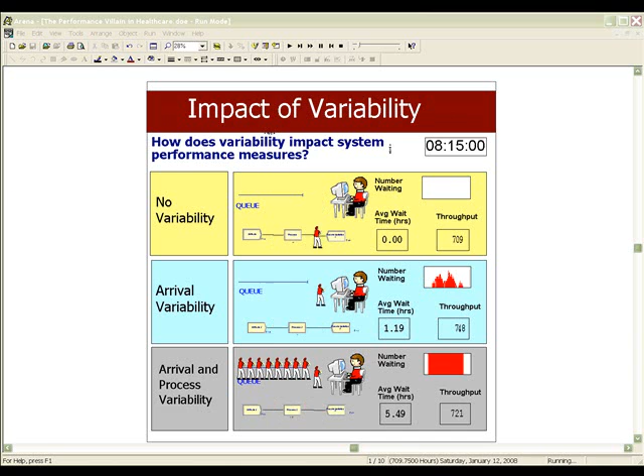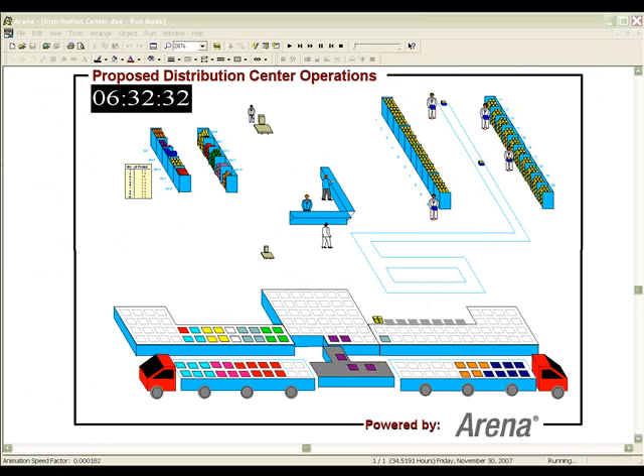Simulation is an advanced tool, typically used by industrial engineers and operations research professionals to design and analyze complex processes. An existing system or proposed system that does not yet exist can be modeled. Simulation is an excellent tool for allowing analysts to predict the future performance and determine the capacity requirements for a particular environment. Key performance measures such as cost, throughput, WIP, and cycle time are used to analyze various system alternatives and determine the best design.

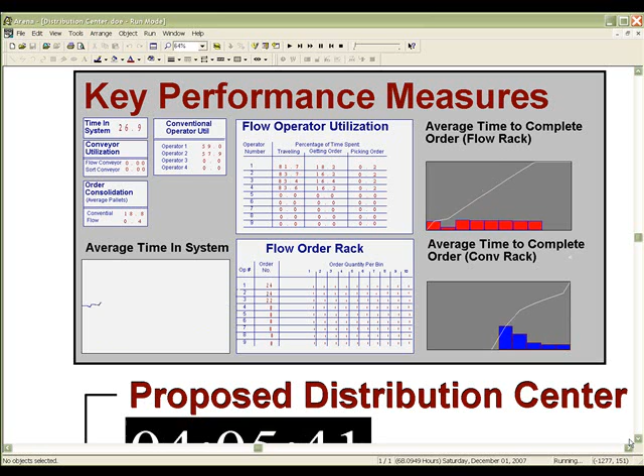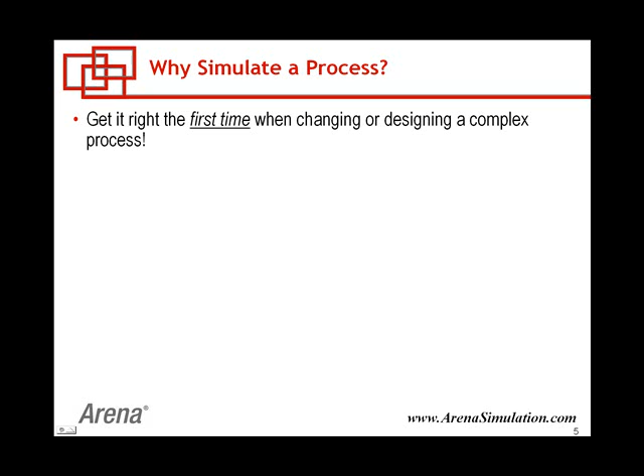Simulation should be used during the design phase of a major project. It allows you to completely understand your system prior to making complex changes or building a new process. Consequently, you get the system requirements right the first time. Today, many corporations have dedicated teams to proven techniques of Lean and Six Sigma initiatives. Arena Simulation is a natural add-on to these projects as it captures the value stream map of a process as well as accounting for the impact of variability.

With the right tools and analysis approaches, you can see improved efficiencies and lowered costs. You mitigate your risks when making major changes when simulation is used. Make your mistakes in the software as opposed to the real world. You will be able to justify capital expenditure decisions and predict resource requirements. The use of animation allows you to communicate ideas to everyone and get team buy-in.

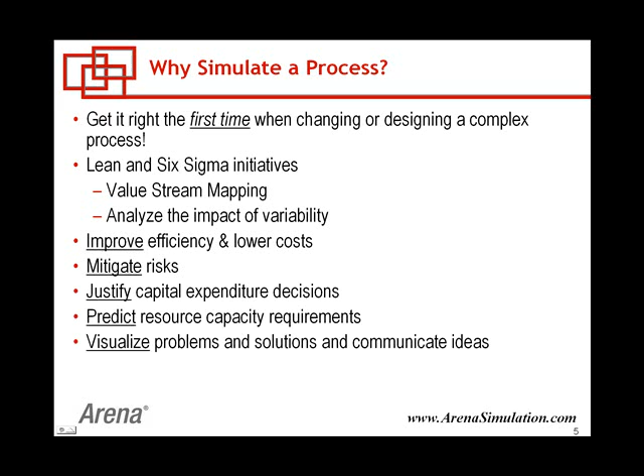From the beginning of a simulation project, when you are mapping out your process flow, you are generating valuable insights. Making the right decisions the first time has proven to provide enormous returns on project investments. Simulation is another tool in your toolbox, and experts know when it will provide critical information. Anytime a major change to a process is going to take place, simulation is appropriate. For example, a new product introduction in a manufacturing environment, an anticipated increase in demand at a call center due to seasonality.

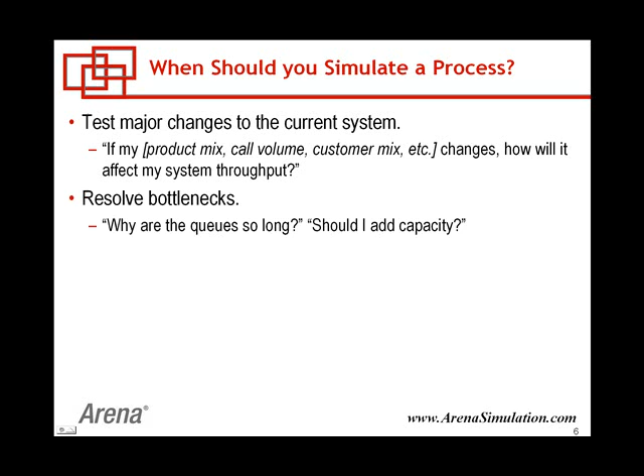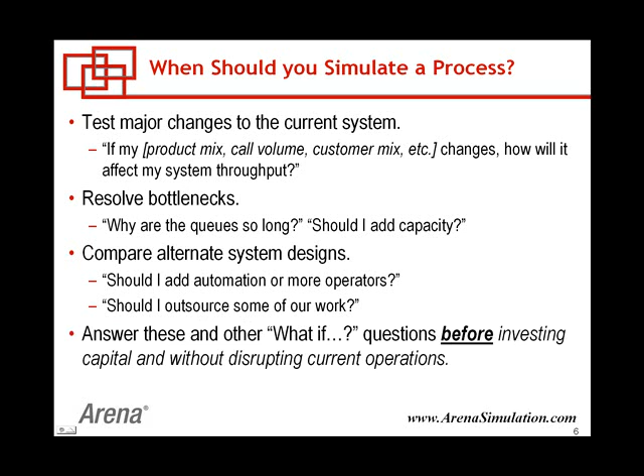You might notice that there are a lot of bottlenecks in your system. Perhaps customers are always waiting in line for a service representative, or you cannot seem to get through a backlog of orders. Model your system and run tests to alleviate the bottleneck. Perhaps various members of your team have different design ideas. Test these alternative system designs and implement the best option. Answer these and other what-if questions before investing capital and without disrupting the current operations.